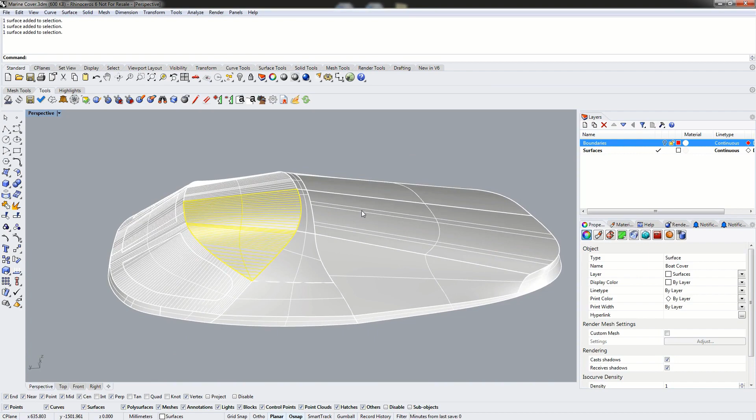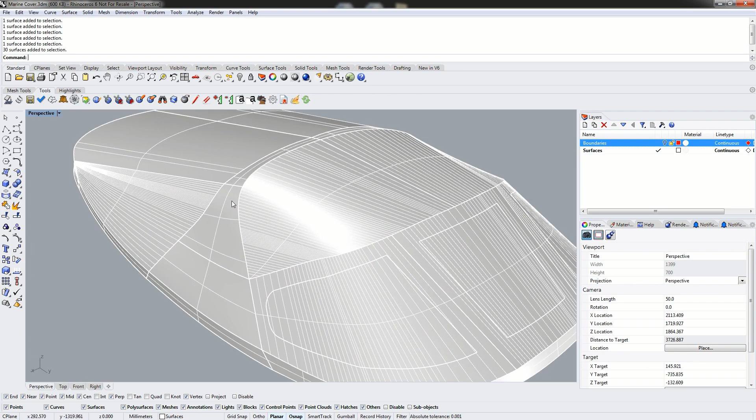This cover came in as a collection of surface objects, so our first step is to join everything together and create a single poly surface. Although we want to flatten this as multiple pieces, we're not just going to flatten surface objects directly. We're first going to create a mesh from it and then use the adaptive remesh to condition our mesh before flattening. So we're going to join all these pieces together to form a single poly surface object, and then create one single mesh out of the poly surface object. The reason we do it this way is so we have very clean preserved edges between all the different surfaces.

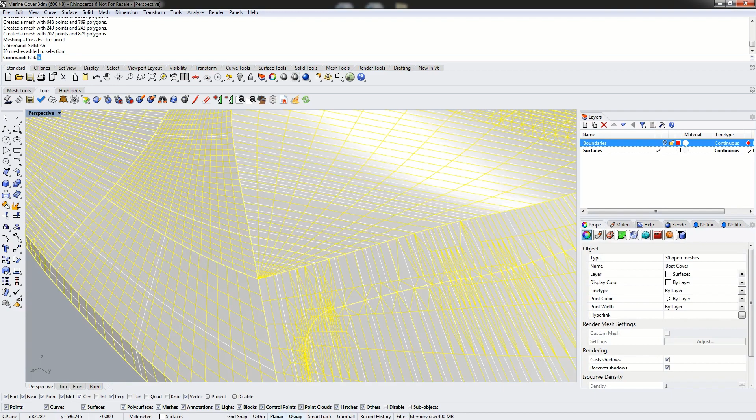So if I were to select everything, we've got 30 surfaces here. If I were to create a mesh out of this using simple controls with more polygons and click OK, and then examine this mesh using SelMesh and isolate to hide all the surfaces and just look at the meshes, we see that the boundaries between these meshes don't line up. None of these quads are lining up when we mesh this separately.

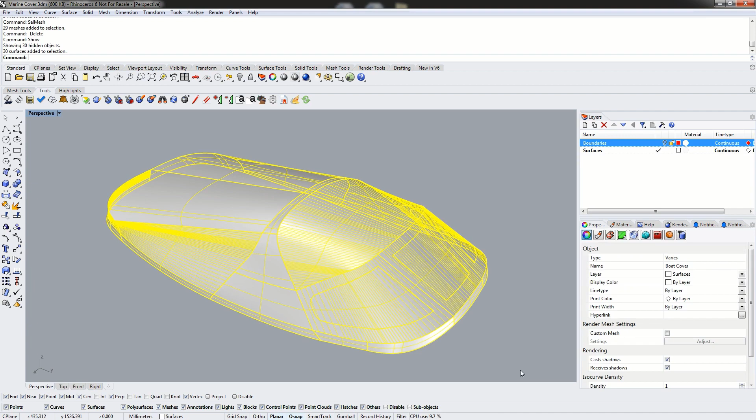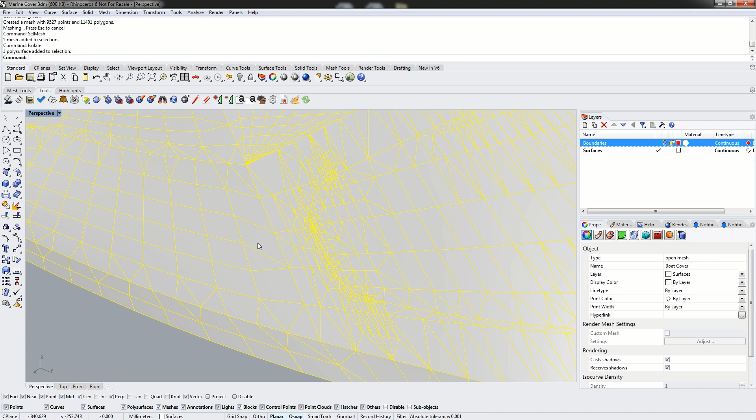So the reason we join everything together - if we don't join it together, we don't have aligned boundaries. So we're going to join it together first, and now if we create a mesh again using more polygons and click OK, and start examining the boundaries with SelMesh and isolate, everything lines up. We've got a much better mesh now, and this is going to greatly improve the reliability of ExactFlat's sewing algorithms for when we create our new mesh using the adaptive remesh. ExactFlat is going to be able to recognize the boundaries, sew them together, and preserve those boundaries. That's why we join everything together to create a single poly surface first before we create a mesh.

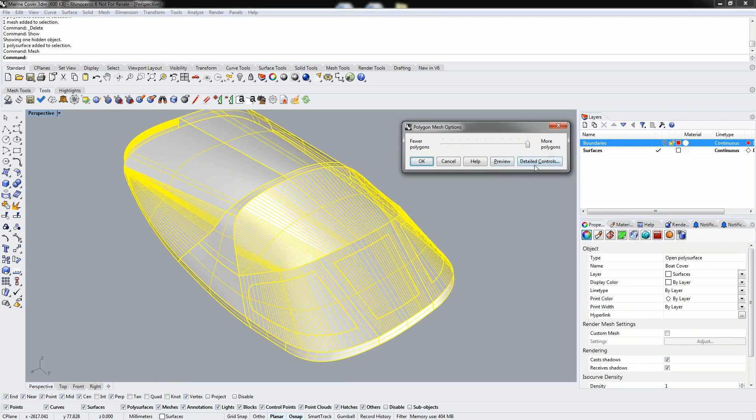So we're actually not going to keep this mesh here. There's a couple characteristics I don't like about it, so we're going to delete the mesh. We'll use Show to reveal the surfaces again, and use the Rhino mesh tool again, but instead of using simple controls, we're going to switch over to detailed controls. This cover was modeled in millimeters, so as we move our mouse we can get an idea for the scale, and we're going to manually set our meshing tolerances here.

As a general rule, I always set the maximum aspect ratio to 2. That just means our longest edge is going to be at most twice the length of our shortest edge on the quad or triangle. This helps control and minimize high aspect ratio triangles. Moving the mouse here, we're always going to start a little high. I'm going to set my maximum edge length to about 100 millimeters and my minimum edge length to 10 millimeters, and we're going to click preview.

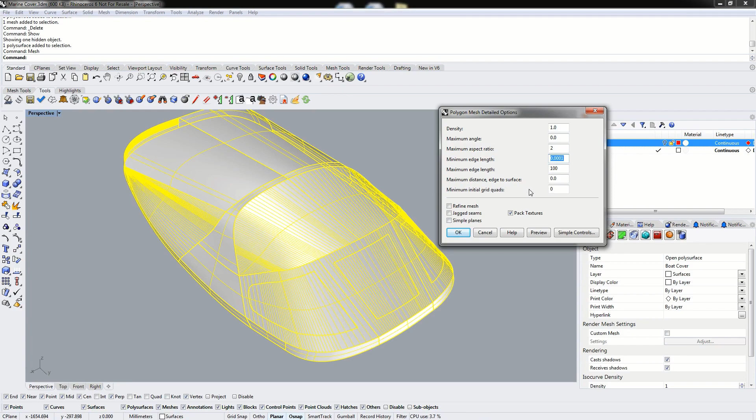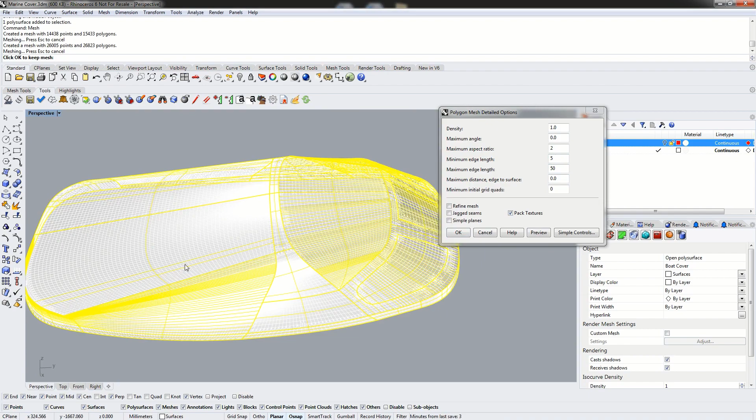This gives us an idea for whether we need to increase or decrease these values. I would like to see a few more triangles with quads along here before I use the adaptive remesher, so I'm going to change these to 5 and 50 - cutting them in half. We'll do the preview, and hopefully we'll be doubling our triangle and quad count here. Our mesh is looking a lot better now already, so we're going to click OK.

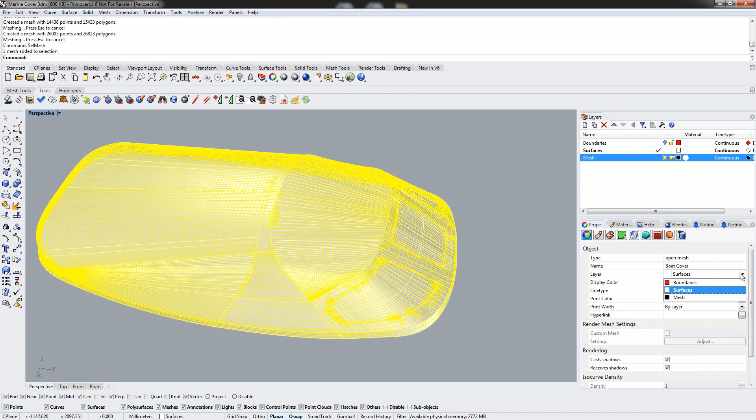Standard best practice is to always keep your different meshes and surfaces, any kind of work you do, on separate layers. So I'm going to create a new mesh layer here, use the SelMesh command to select my meshes, and change them to the mesh layer. Now I can turn off my surfaces and only view the meshes. So we've created one single mesh from meshing one single poly surface.

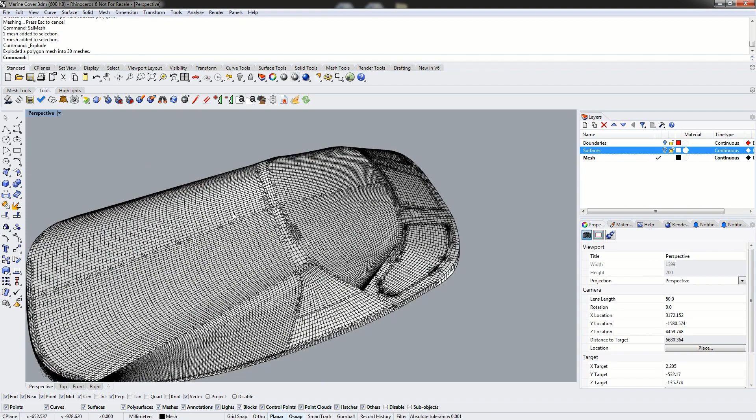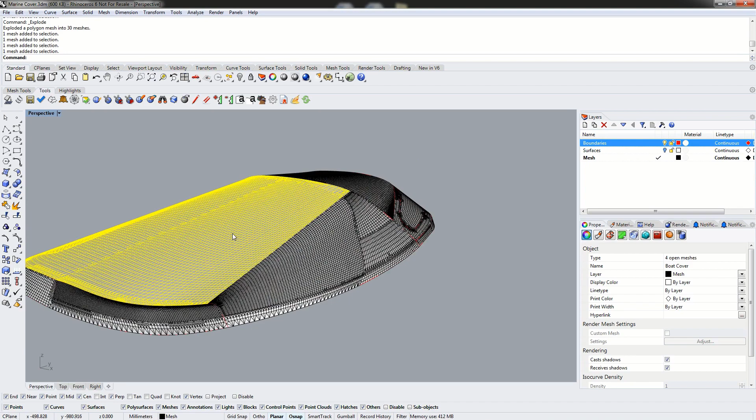Our next step is to explode this mesh so we can rearrange the pieces into component pattern pieces. Before we started looking at this, I actually duplicated the boundaries of where we want our pattern pieces to go, and highlighted them in red, which makes it easier to select the pieces for creating our pattern. We can see we've got our boundary right across the top here. So I'm going to start selecting my mesh, and join these together as one single pattern piece, and we'll just repeat the process for all the pieces that form our pattern.

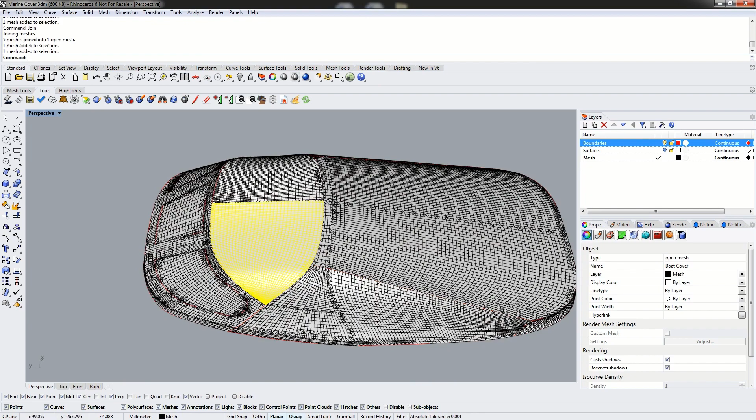Join those together, join these together. Join the right and left half of these together. And we're actually going to join all these together too. So this would be the windshield here.

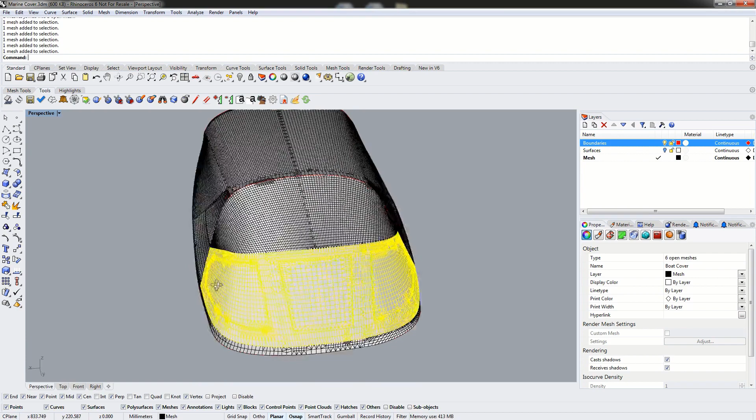We can actually see where the cutouts are, and I identify these as a boundary that we want to keep. However, for flattening, it's much easier to fill these in. What we're going to do is use the ExactFlat trace command to trace this boundary profile back onto the pattern piece after flattening. So for flattening purposes, we're going to join all of these together into one single sheet.

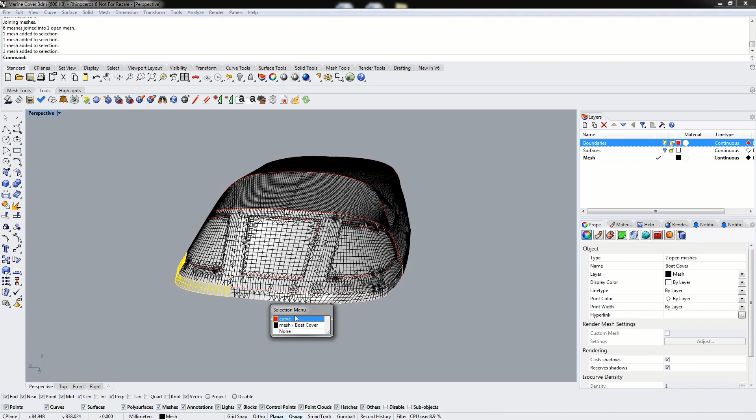And then lastly, we've got our pieces down here along the bottom, and we'll join these together as well. Now we'll just do SelMesh. We've got 7 pieces, which is what we should have. So we've got all our pieces joined together now.

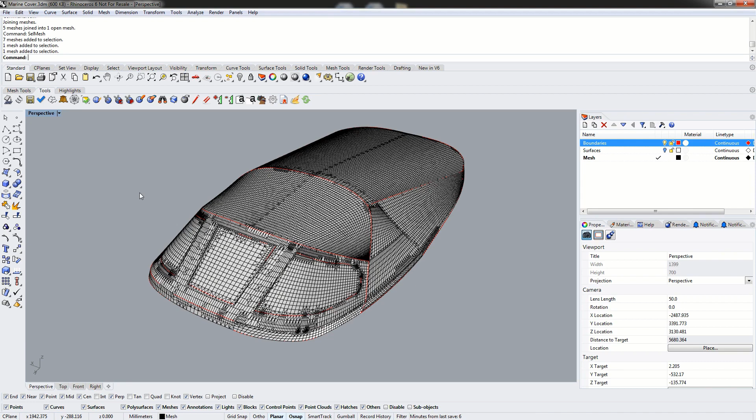So when we created a mesh from the poly surface, it created individual meshes for every single surface, then joined them all together, very much the same way we did here. Because we had independent collections of vertices and triangles, one per surface, when we use the explode command, it searches for those collections and breaks them out into separate meshes. If I were to explode these, I would again get 7 different meshes, or however many meshes we have here. Similarly, if ExactFlat were to try and flatten this, it would again explode them into the individual component pieces.

So what we need to do is eliminate all the duplicate vertices and merge all these independent collections of triangles and faces into a single collection.

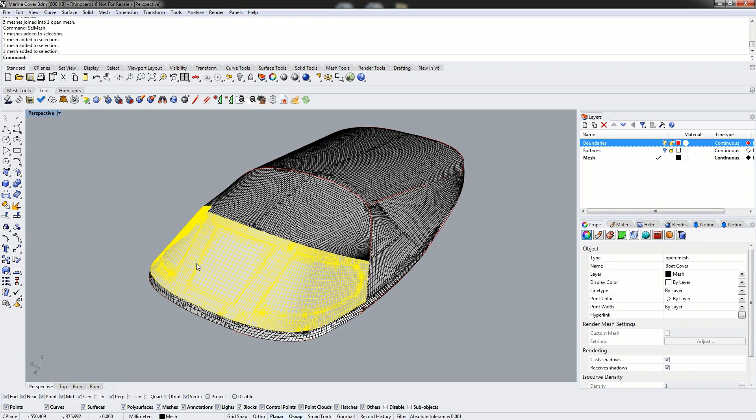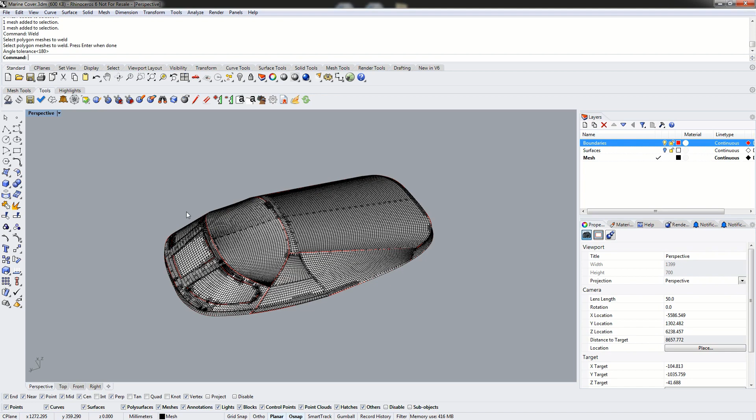The way we do this is with the Rhino weld command. So we're going to type in weld, select all of our meshes, and weld them all with an angular tolerance of 180 degrees. This is going to go through all our meshes and find duplicate vertices—two vertices within the same mesh container that occupy the exact same space—and merge them together into a single vertex.

So now, if I select one of my pieces here and try to explode it, explode's not going to work because I've merged all the duplicate vertices. We only have one unique collection of vertices and triangles now, which is what we want.

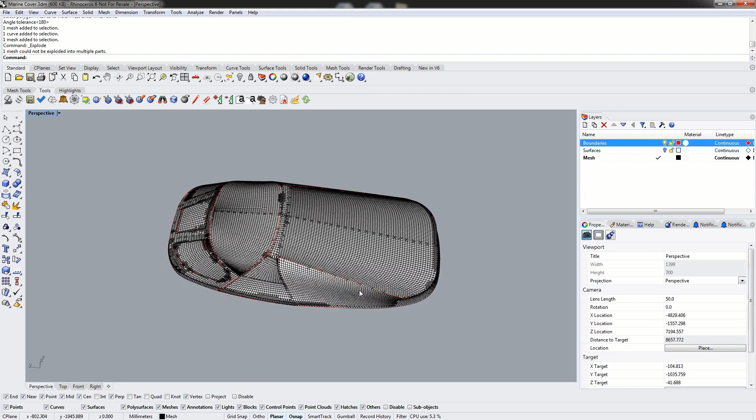So before we flatten these, as we look at them, we can see we've got mostly quads, and most of the triangles are the same size. However, we do have some fairly high aspect ratio triangles, and a lot of triangles that aren't really needed. When we consider the back piece here, it's mostly flat, but we have a lot of triangles or quads all the way down the back. So what we're going to do before flattening is use ExactFlat's adaptive remesher to both decimate the mesh and simplify the geometry of the mesh.

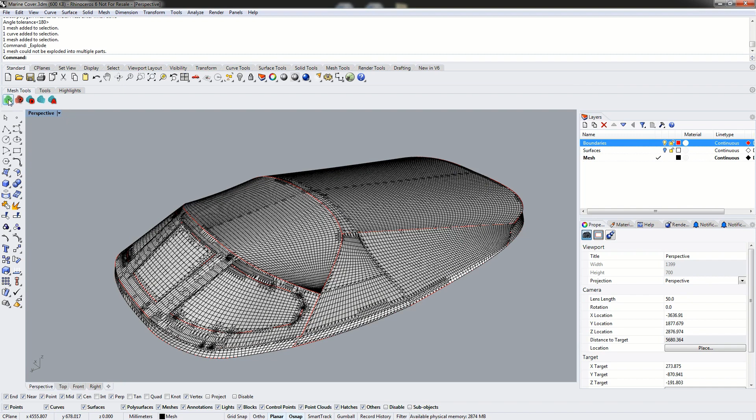To do this, we're going to switch over to the Mesh Tools tab of the ExactFlat toolbar. First, we're going to validate the meshes, making sure we don't have any geometry problems such as geometrically degenerate triangles or topologically degenerate triangles. So we'll use the mesh validator, rectangle select everything, and it's telling us that all our meshes are valid. If we did have a problem, that would have to be fixed before we can use the remesher, but we don't have any problems, so we're good to move on to the adaptive remesher.

So we'll start the tool by clicking this icon here for the adaptive remesher, and again, we're going to rectangle select all our meshes.

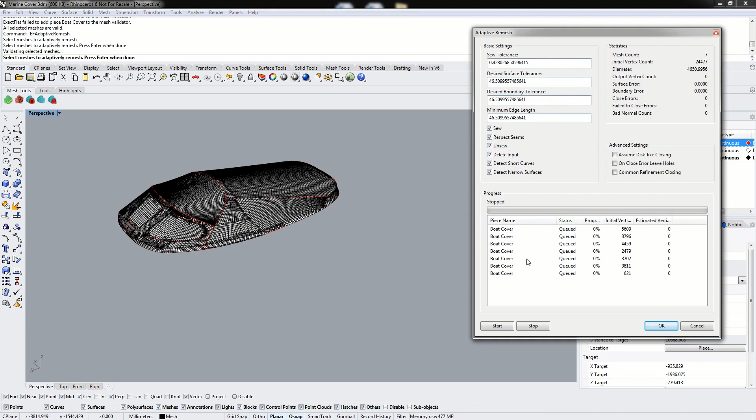Once the dialog comes up, before we change any settings, we're always just going to click the Start button, and this is going to give us a baseline. It's going to let us preview the mesh to see what the quality is. And if we need more triangles, then we can reduce the tolerances here. If we need fewer triangles, we can increase the tolerances.

So the way the tolerances work is they are the maximum allowed distance between—we've got surface and boundary tolerances. They're the maximum allowed distance between the original surface and the new surface created by the remesher, and it's the maximum allowed distance between the original boundary and the new boundary created by the adaptive remesher.

So if we need to preserve more detail, create more triangles. In this case, we've gone from thousands of triangles or vertices down to simply a couple hundred. Then we need to reduce the allowed distance. So in this case, we're going to reduce our distance to 30 for all our values here.

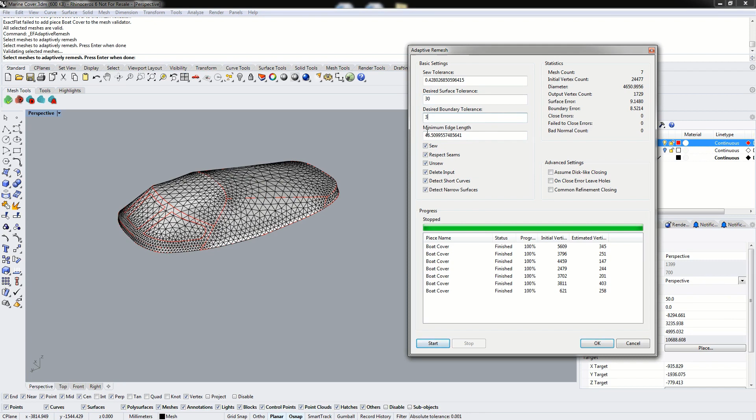We'll click Start again, and we're going to see meshes that now have more vertices, so we're preserving more detail. We can see we've got more triangles here, more geometry, and we're preserving more of this detail. If we reduce it even further, we'll do 10, 10, and 10. We're going to end up with even more triangles and vertices on our new mesh now.

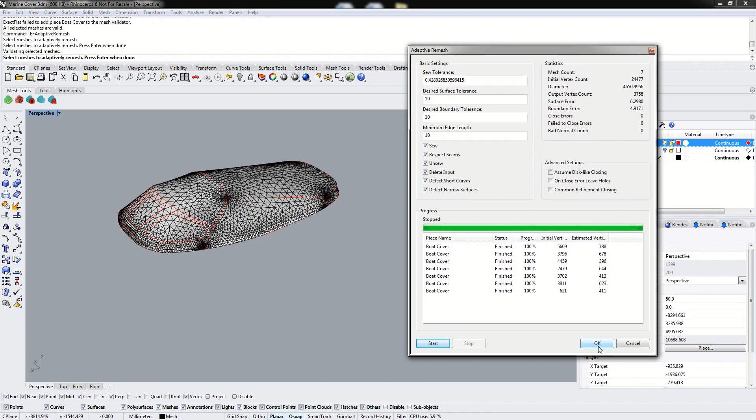So we'll go ahead and we'll click OK to accept changes. So at this point, it's safe—we can start flattening now.

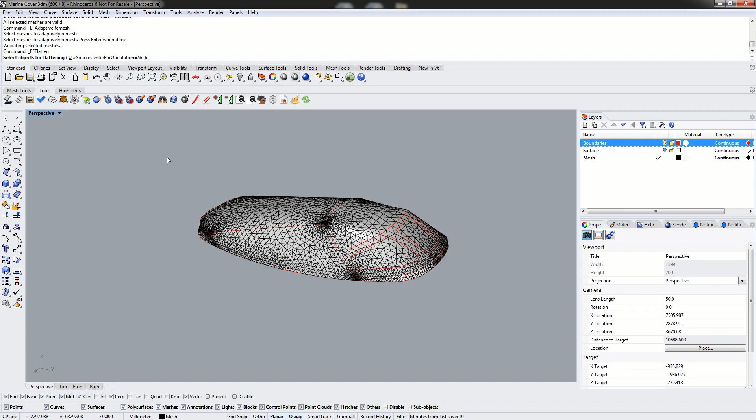So to flatten these objects, we're going to switch over to the Tools tab of the ExactFlat toolbar, and we're going to click the Flatten command to start the flattening process. The flatten command is simply just one of our pre-flatteners; however, it is the entry point into the ExactFlat flattening process, so we always have to use the flattening command to start flattening things. It's going to create the flattening workspace, as well as use our press pre-flattener to create an initial unoptimized flat pattern.

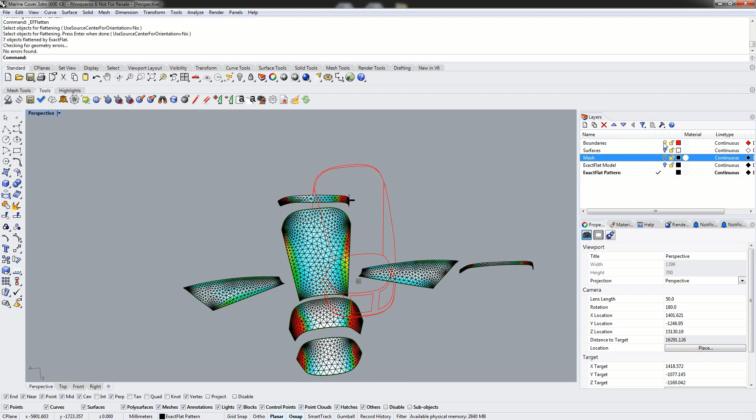So at this point, we're going to make our ExactFlat pattern layer the default layer, and we're going to turn off all the other layers because we don't need to see this information at this point. We're also going to minimize our perspective viewport by double-clicking on the title, and we're going to maximize our top-down viewport by double-clicking on the title here.

So we've already used one pre-flattener when we used the flatten command—we used the press pre-flattener to create our initial unoptimized flat patterns. However, when we look at these patterns, we've got flipped triangles on this one here, and for most of the pattern pieces we see red, which indicates we have high strain. So all the colors on the pattern pieces represent the relative amount of strain on the pattern piece. And if we consider the 3D reference model, we can turn this back on and examine it at any time.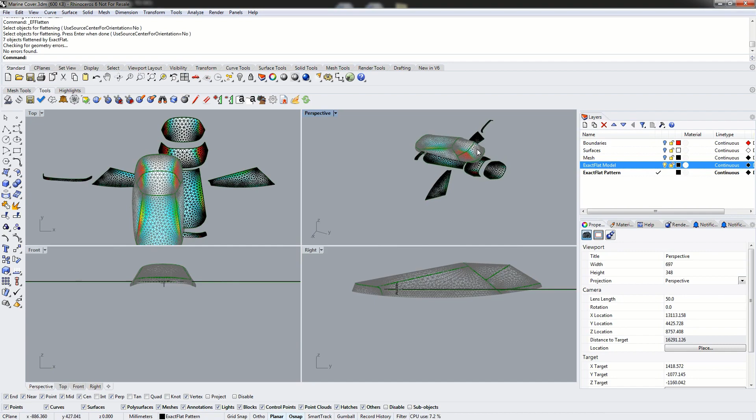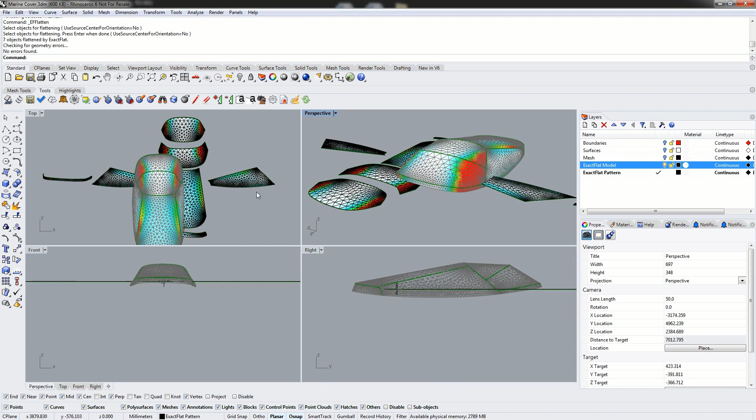I'm just going to switch back to our 3D perspective viewport. So we've always got a reference model and a 2D pattern, and the strain is always the same on the reference model as the 2D pattern, so we can see where our areas of high strain are on our pattern pieces. If we consider our 3D model to be a rigid shell, the strain represents how much we're going to have to stretch and pull the 2D pattern pieces to get them to fit back onto the 3D model. So in this case, we have high strain on all of our pattern pieces, which needs to be dealt with.

So really, the goal of the optimizer is to reduce the strain and average energy density to as close to 0 as possible. But because ExactFlat is a two-stage flattener, we have two different sets of tools for doing this. We've got our pre-flatteners, which are the very first tools that are used, and our flatten tool does use one of the pre-flatteners to create the patterns. They're very, very fast tools, and their goal is first and foremost to remove flipped triangles.

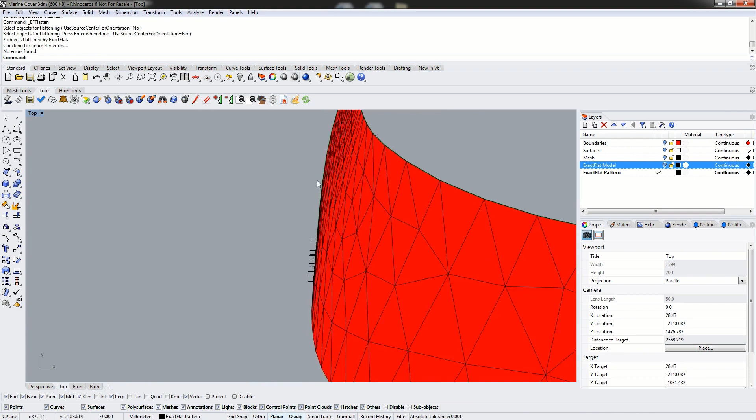So when we look at this piece here, we can see we have flipped triangles here, and these are just triangles that are folded in under themselves to create a fold or a wrinkle. The second goal of the pre-flatteners is to reduce the strain on the pattern piece and eliminate a lot of the red coloring. We can do this with any of ExactFlat's pre-flatteners—we've got our fracture pre-flattener, our pelt pre-flattener, and our CCM pre-flattener.

So for these pieces, I'm just going to start with fracture, and as I start selecting edges, we're going to get a different pattern piece for every single selection point. So the biggest goal here is just to remove flipped triangles and to reduce the strain as much as possible.

So you don't have to spend a lot of time clicking around getting the absolute best pattern. So long as you don't have flipped triangles and you don't have a lot of strain, that's a good starting point. So again, we'll do this with this next piece.

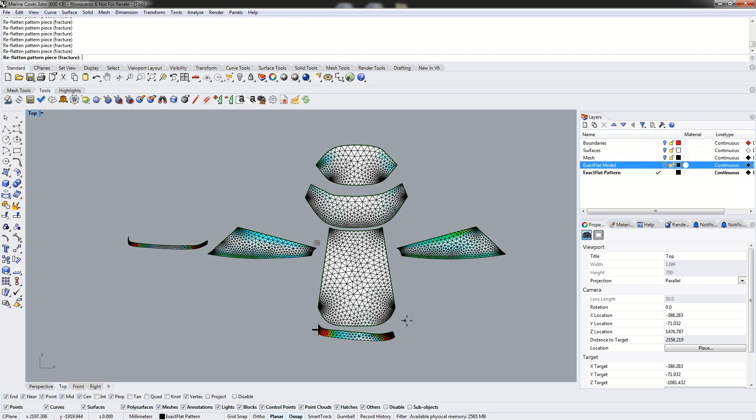We've eliminated there weren't any flipped triangles, but we've expanded the piece and we've eliminated a lot of the strain. The same for over here, and because this piece is actually near developable, in this case we ended up with a pattern that is very, very close to the perfect pattern.

So we'll just repeat the fracture process on the remainder of the pieces, and for this one down here, by fracturing it, we've eliminated the flipped triangles as well as reducing the strain. We still do have quite a bit of strain in this area here, but because of the nature of this piece, it's a very thin piece.

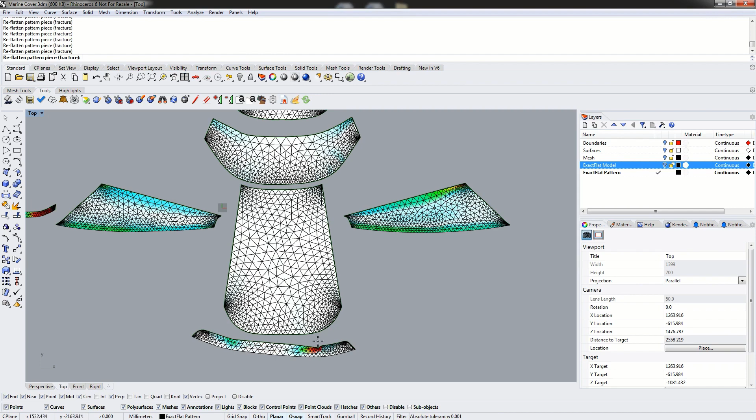This is probably more of a local anomaly than anything, so we're not going to worry about it. The optimizers will succeed in removing the strain. So we'll just fracture the remaining pieces here, and now we're good to go.

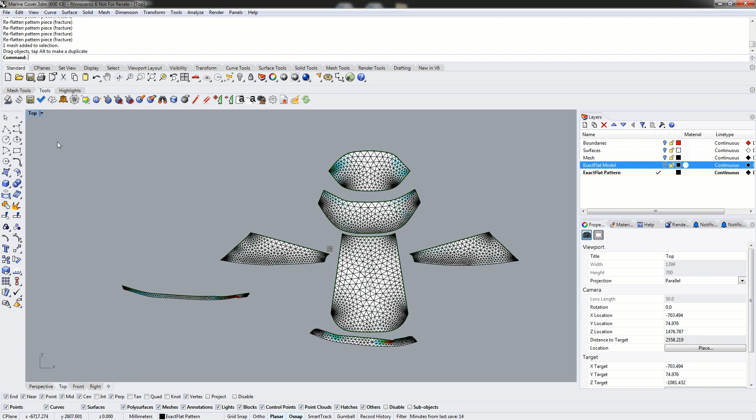So by using the fracture algorithm, we've spent very, very little time, and we now have pattern pieces that are very close to final pattern pieces. So we've greatly reduced the amount of time that's going to be required for the optimizer to optimize these to the final pattern. So now we're going to go ahead, we're going to optimize the pieces.

So we're going to select all our pieces here, and we're going to go ahead and press enter on our keyboard.

So at this point, we are now looking at the spring settings. We're going to leave all of our settings at defaults. And we're going to use a simple cotton for optimizing this pattern.

If we do need to use a different material, we can click the Browse button to open up the ExactFlat material browser, and we can select from one of ExactFlat's 85 default materials.

If there isn't a material in the library that works or suits your needs, then we do have the ability to add custom materials to the database.

You can either measure the mechanical properties of the material yourself, or we do partner up with a university, and for the cost of about $25 US, it usually takes about 5 business days. They will be able to measure the mechanical properties of your material for them.

I believe you only need to send about a 1 foot by 1 foot swatch of material, and once they're done measuring the properties, they will send you back a report which you can then use to create your own mathematical model of that material in ExactFlat for your private use.

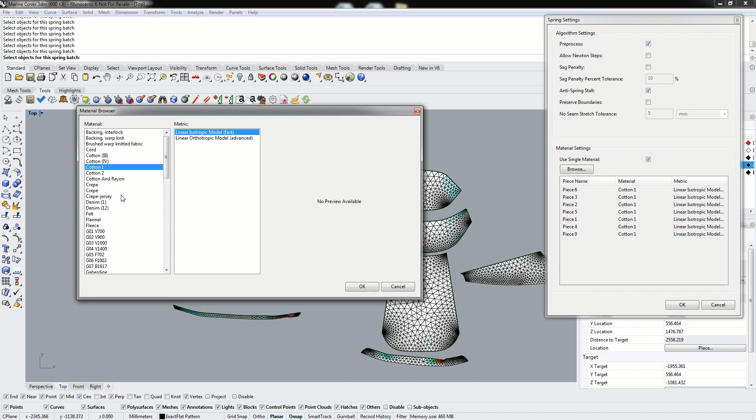So once we select our material, we just click OK, and now we're going to start the optimization process by clicking the OK button.

So as ExactFlat optimizes the pattern pieces, we're going to see not so much with this pattern because we're very, very close to optimal pattern pieces already, but for these two pieces down here especially, we're going to see the shape is going to change and the colors are all going to change more towards white.

So as I've already mentioned, the colors on the pattern pieces do represent the amount of strain on the pattern piece. So the default ExactFlat legend has white representing 0 strain, cyan or blue representing 5% strain, green is about 10% strain, yellow is 15%, and red is 20% or more.

So as we optimize the pattern pieces, we're reducing the average energy density, or in the case of these pieces, we're actually expanding the pattern piece, we're adding material, and that's how we're reducing the average energy density. So because we're adding material, reducing the energy density, we're reducing the strain.

So we can see this being reflected in the strain analysis by means of the colors all changing from red and yellow. They're all changing towards blue and mostly white.

So a couple ways we know that the patterns are a good fit. The primary way is simply by looking at the color of the pattern piece. When we see the color changing towards white, we know we've got a very low energy density on the pattern piece, and we know that because we've got very low strain or energy density, that's going to be a good fit.

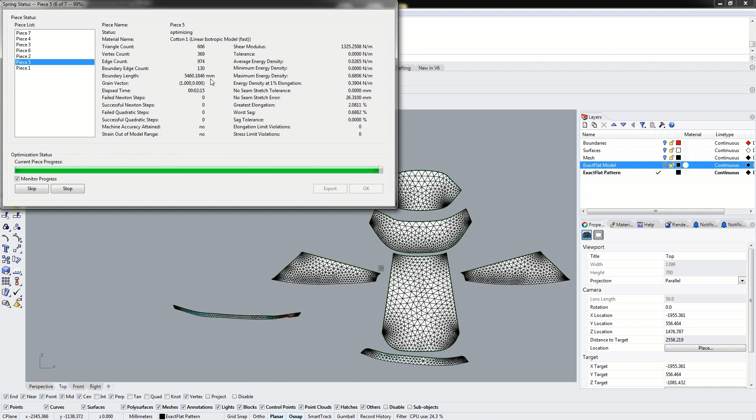So we can compare the perimeter lengths of the patterns to make sure we've got a good fit here. A couple things to look for as far as the boundary length of the pattern piece: for this piece here, our boundary length is about 5,500 millimeters. We've also got our no seam stretch error. I'm just going to switch back to piece 5 for this one here. So we've got 5,500 millimeters for the perimeter length, and our error is 26 millimeters.

What this error represents is when we compare the perimeter length of the 3D model piece and the perimeter length of the corresponding 2D pattern piece, the no seam stretch error is the difference between the two. So when we compare 3D to 2D, our perimeter length difference is about 26 millimeters, and when we consider that our error is 26 millimeters out of 5,500, that is a very, very small error—that's less than 1% error.

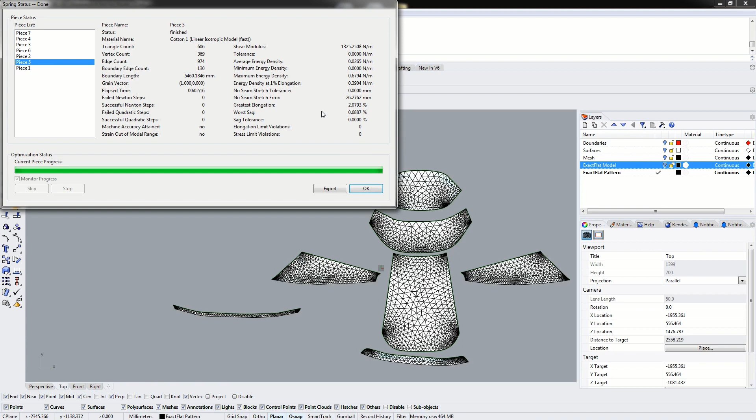This error is distributed around the entire perimeter, so when we go to sew this back together, just because of the stretch of the fabric, this error is going to be very manageable and not noticeable. If this is still too much of an error, we do have some options we can set in the spring settings, specifically the preserve boundaries option, which will help further reduce the no seam stretch error at the expense of adding additional strain to the pattern piece.

We're going to go ahead, click OK, and now we're going to rearrange our pattern to make it a little easier to see where everything goes. We're going to start with this piece here as the big long piece at the back, and first we're going to rotate it. It looks like it's already in the correct orientation, but we're going to rotate it anyway.

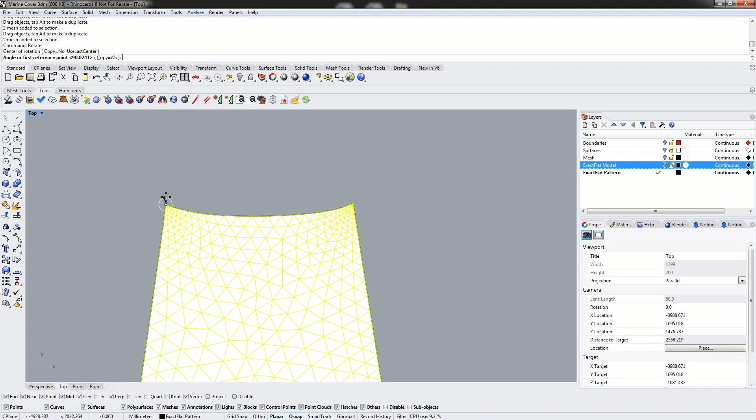So we're going to use these 2 points as our reference, and I'm just going to hold Shift on the keyboard to snap my point along the horizontal x-axis, and rotate this so it's perfectly horizontal. Next, I'm going to use the ExactFlat Find tool to find all the neighboring pattern pieces, and the Find tool is going to allow us to rotate them and snap them back to where they should be.

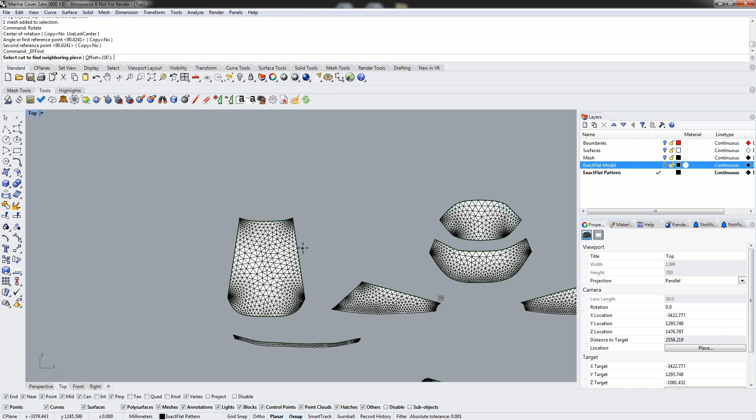So we'll notice as I move my mouse along the edge here, we're seeing a highlight, and if we look at the far right piece, we can also see a corresponding orange highlight, which tells me those two edges match up. So if I click on this edge here, the far right piece is going to rotate and move to match my selection point. Using the ExactFlat Find tool, we can very quickly find and recreate our pattern.

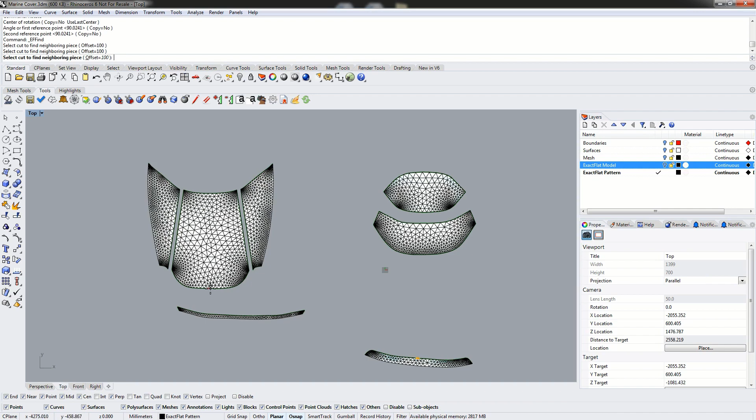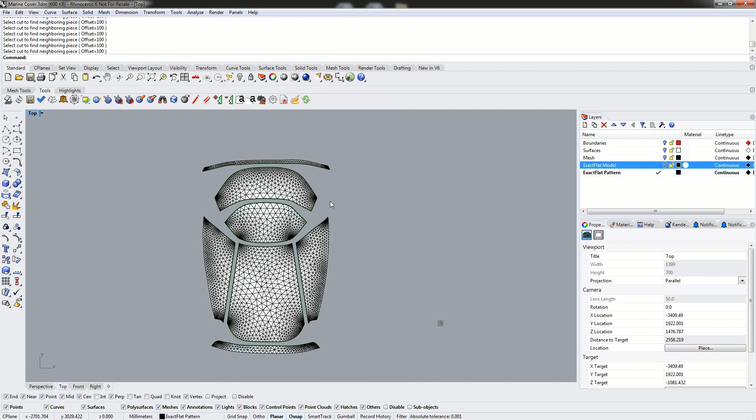When we look at the front windshield, we flatten this as a single piece, even though we do have cutouts for the windscreen. To add these cutouts, we're going to use the ExactFlat Trace tool, and in order to do this, we need to go back to our 3D model. So we're going to turn on our 3D reference model, and we can see it down here to the right. To make it easier, we're going to go back to our perspective viewport.

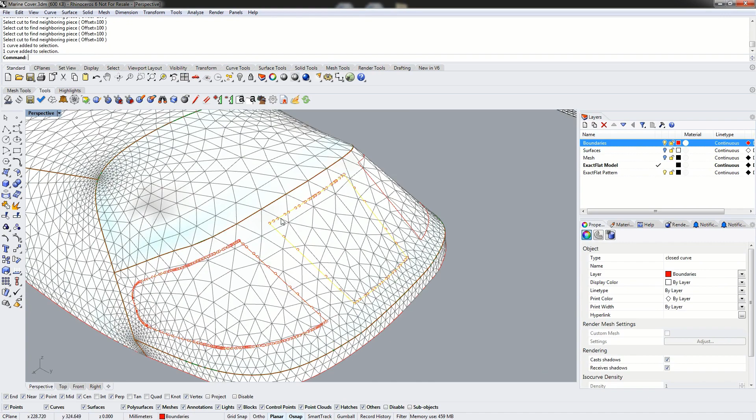So now we have our 3D reference model over here on the left, and we have our pattern over on the right. We also have our original layer with the boundary curves that we created, and on this layer we have 3 curves that were right on the surface, indicating the location of our windshield cutouts.

What we're going to do is trace these 3 curves onto this pattern piece using the trace command. For all Rhino commands, including ExactFlat commands, the command line will always tell you what's expected of the command. Right now, after starting the trace command, it's telling us to select one or more objects to trace, so we're going to select our curves here that represent the cutouts for the windshield. We'll press enter when done selecting.

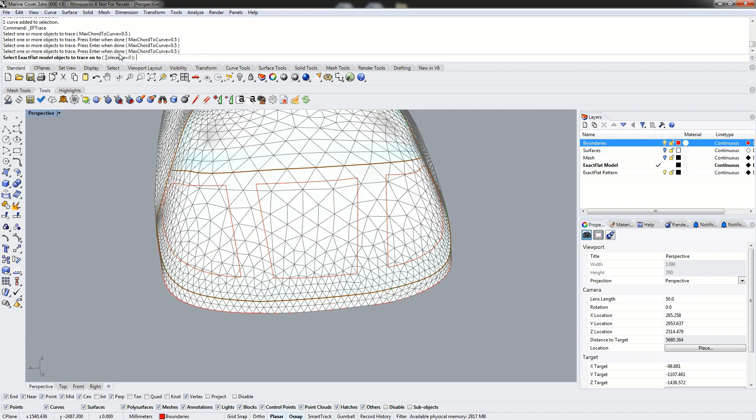Next, it's telling us to select the ExactFlat model objects to trace onto. This is our target for the trace. So we're going to choose our front windshield here, and press enter.

This dialog appears when we're converting a curve or spline into polylines, giving us a preview of how many vertices there will be. This is basically our fidelity for the trace curve. If we move the slider all the way to the right, we get less fidelity, or fewer vertices. If we drag it all the way to the left, we get a lot more vertices.

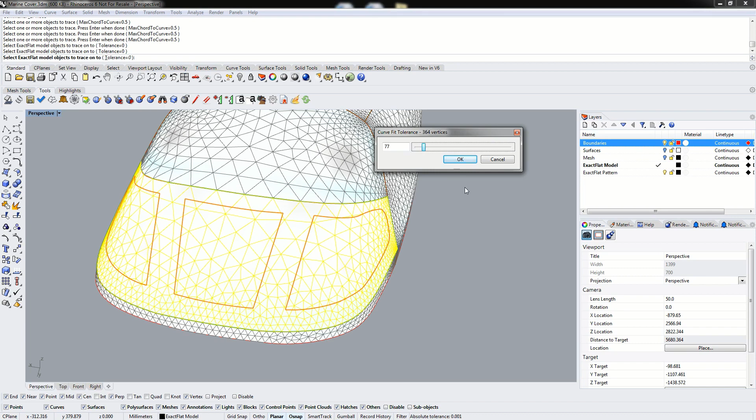We're just going to aim for something around 300 vertices or so, which is more than enough to do the trace. We'll click OK, and ExactFlat is now tracing these curves onto the 2D pattern. If we zoom out, we can see that ExactFlat has in fact traced them on. To make this a little easier to see, we're going to switch over to the Highlights tab of the ExactFlat toolbar and turn off the edge highlight.

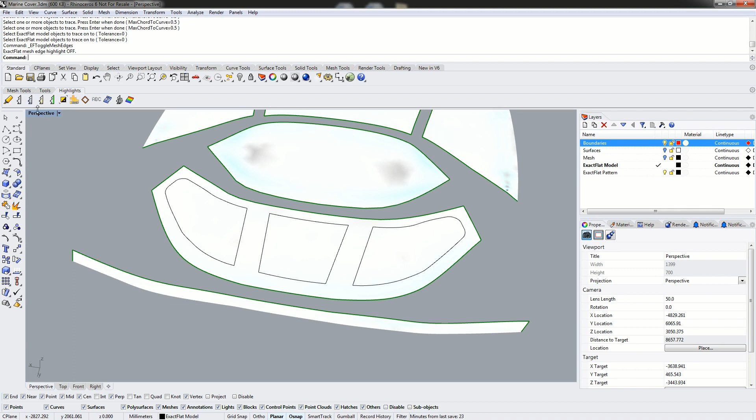Now that we've traced our curves onto the pattern, we can start adding notches to this pattern piece. We're going to go back to our top viewport and hide our model again by making the ExactFlat pattern the default layer. We're going to turn on the pattern, turn off the model, and turn off the boundary curves.

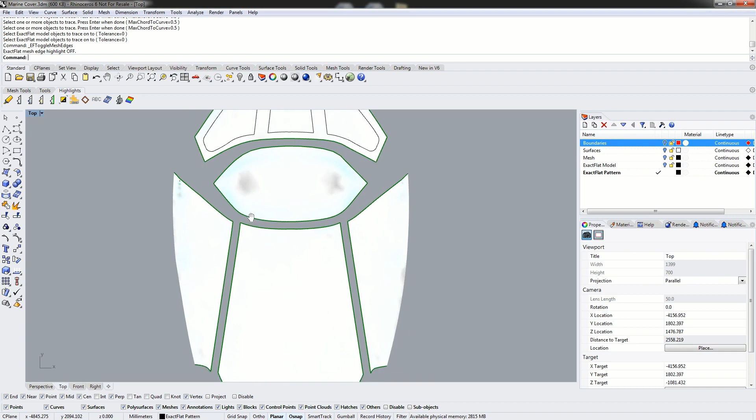Now we're going to use the ExactFlat notch tag tool. We'll switch back to the Tools tab of the ExactFlat toolbar and turn on the notch tag tool. We're just going to use the default settings for the notch tag, and this is going to create a simple slit notch. It's going to create it the entire length of the seam we're adding, and our tag is just going to be a single auto-incrementing unique number, starting from 0 and going all the way up to however many notches we add.

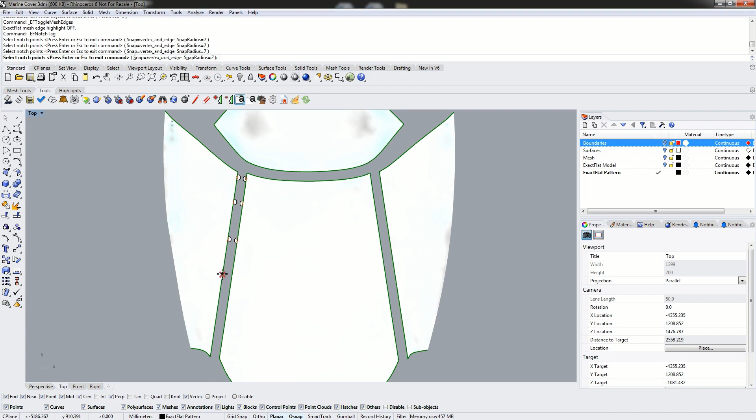So we're going to click the Add button. It hides the dialog, and now we can start selecting locations on the edges here. We'll notice as we select a point on one side, we're actually creating 2 notches - one on the left-hand side as well as the right-hand side of the seam. This greatly assists with the sewing process, allowing us to ensure the right and left-hand sides are sewn together at an even rate.

Once we're done adding all our notches, we can go ahead and create a DXF, or just work with our pattern in Rhino. Once we've flattened the pattern pieces, you're not forced to use the ExactFlat patterning tools, although we do have patterning tools such as piece tags, notch tags, and our trace tools. You're not required to use them - you can simply bring this pattern into another package such as Optitex or Gerber AccuMark. The easiest way to do that is to create a DXF.

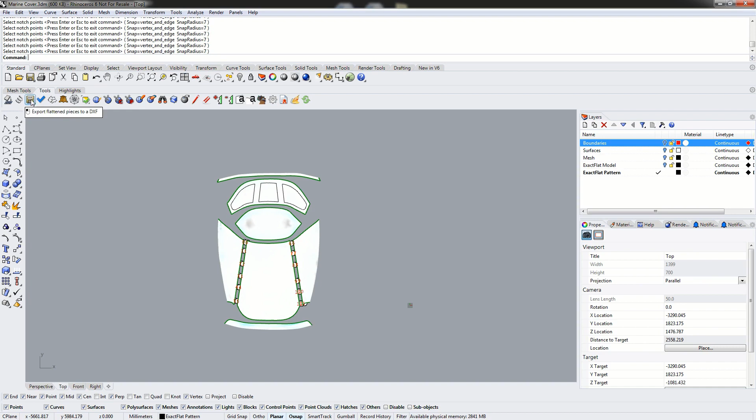We can do this simply by clicking the DXF icon in the ExactFlat toolbar, and this is going to ask you to choose a location and a file name for creating a DXF. So we're just going to go to our demo folder here, the marine cover, and create this DXF called boat cover.

So we've created our DXF, and now what we're going to do is import this DXF into the document here, and we'll have a look at the file structure of the DXF. I'm just going to use the import command, and we'll import our boat cover.

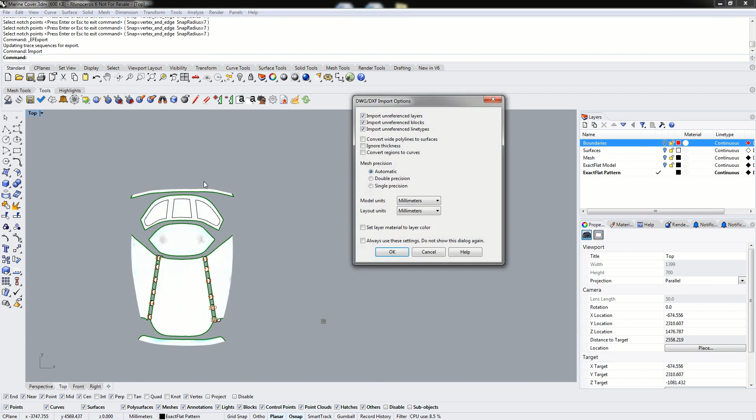And now we can see the DXF that we've created. So on our pieces here, our DXF is comprised of multiple layers. If we look at the layers over here, we've got a grain layer, cut layer, seam layer, notch tag, and we also have our traced lines layer. This is because we traced the profile of the window cutouts onto this pattern piece as well.

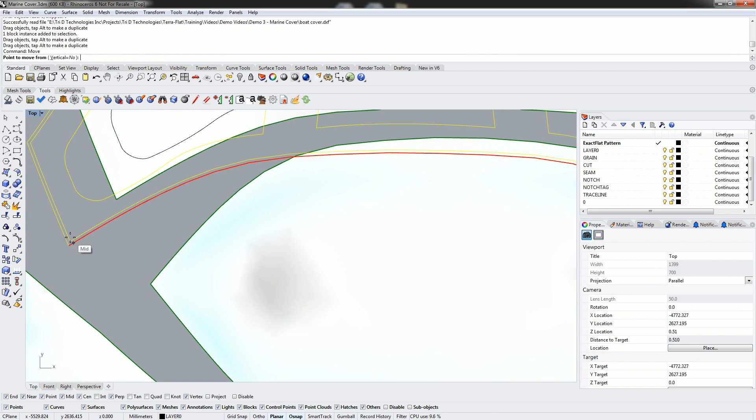So we'll just drag one of these pieces over here, and actually I'm going to use the Rhino move command. I'm going to move this piece right from the point here, trying to get it on the interior point. There we go, and we're going to move it right here. That way it's perfectly aligned.

So when we look at this piece here, we can see that our blue line represents the perimeter of the pattern piece. So this is our seam line. And we also have an optional red line here, which represents our cut line. So this is the seam line plus whatever seam allowance we have configured in the ExactFlat options.

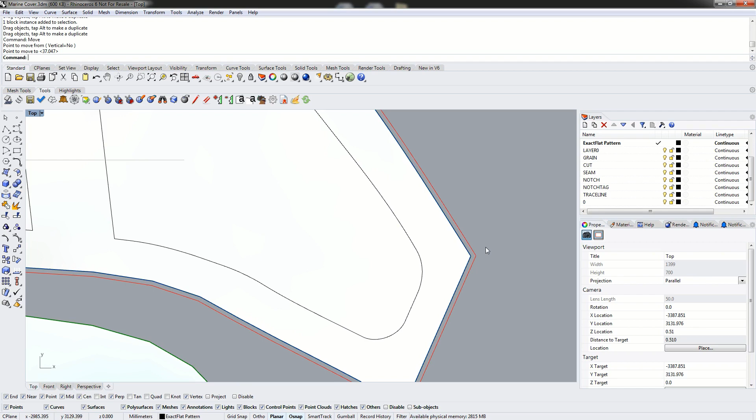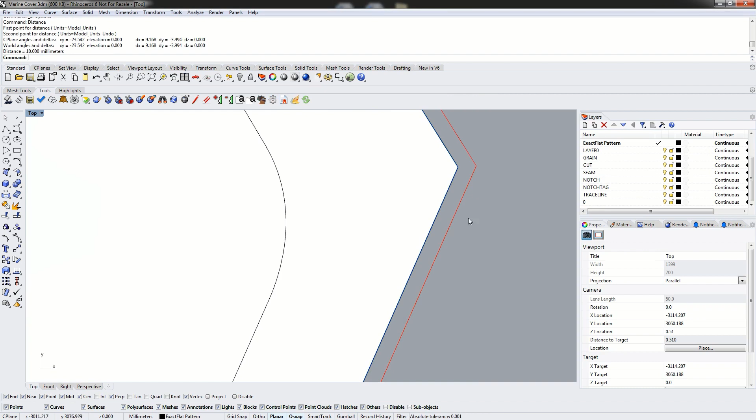So if we look at our ExactFlat options real quick here, we'll expand the ExactFlat tab. We're going to go to the DXF export tree item. And when we look at our DXF seam allowance, it's set to 10 millimeters right now. So if we measure the distance between our seam line and our cut line, it should be 10 millimeters. So we'll do the perpendicular, and we've got a 10 millimeter difference here. So our blue line is our seam line, or the natural perimeter of the pattern piece. Our red line is our cut line, which is a seam line plus our seam allowance.

And we also have a gray line here, which represents our grain line. In this case, because we didn't manually specify a grain line using the ExactFlat grain line tool, the grain line is assumed to be the horizontal x-axis. So you can rotate your pieces however you need to before exporting a DXF, and you can safely assume that the horizontal x-axis is always going to be the grain direction.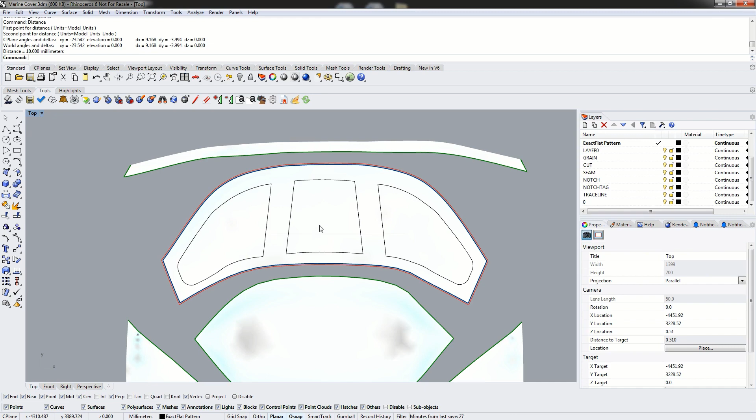So one benefit of the DXF export is because we have so many layers here, when we import this into another system or even our cutting table, we can simply turn off the layers that are not needed. And in terms of a cutting table, we can assign different tools to different layers.

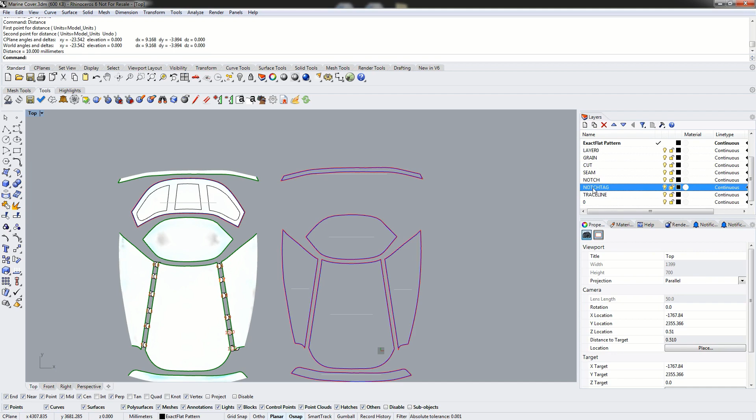So we might want to assign a pen tool to the seam layer, that way we're penning out where we need to sew to help with the sewing process. We may want to assign a wheel cutter to our cut layer to cut out all the perimeter. We may want to assign a drag knife to our notch layer to cut out the notches, and we may want to simply turn off our notch tag layer, or we could assign a pen tool or an airbrush to our notch tag layer to actually pen out the notches, or the tags, that are created for the notches here.

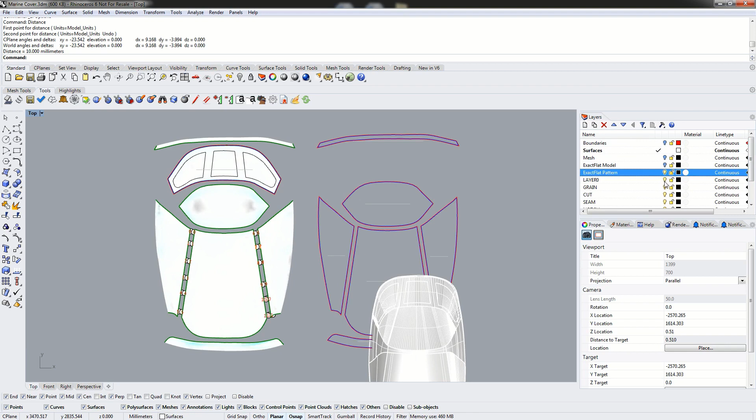So this has been a demo showing how to flatten a marine cover. To summarize, we started out with our surface, and once we had our surface, I'll just turn off everything else here. Once we had our surface, we went ahead and joined our surface together into a single poly surface, and then we created a mesh from it.

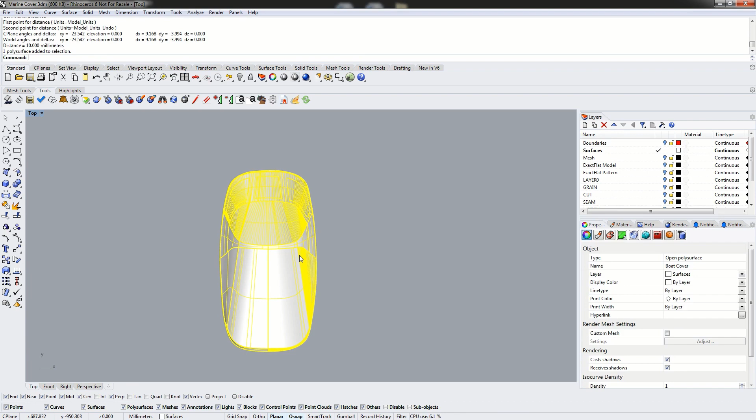And the reason we do this is to ensure that all the boundaries between individual surfaces, when we create our mesh, are aligned in terms of mesh vertices. So we've created a mesh out of our surface, and we went ahead and remeshed it. Once we remeshed it, we flattened it using ExactFlat and created our pattern pieces.

So once we had our pattern pieces, we used the ExactFlat pre-flatteners. Specifically for this one, we used the fracture pre-flattener to remove as much strain as possible. After we did that, we used the ExactFlat optimizer, the spring tool, to reduce the average energy density to as close to zero as possible.

We then used a combination of the Rhino rotate and move tools to move one of the pieces, and then we used the ExactFlat find tool to find all the neighboring pattern pieces and snap them back to the correct location. We then used the ExactFlat trace tool to trace the location of the window cutouts onto the pattern piece. And then we used the ExactFlat notch tag tool to create notch tags.